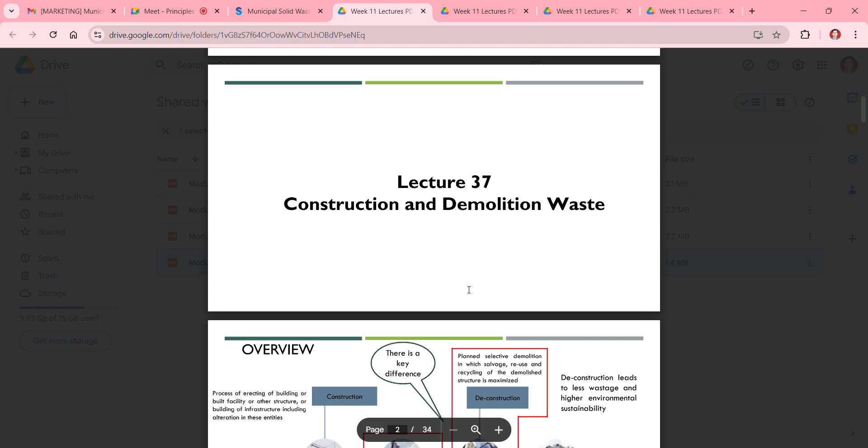Now we will talk about some special waste categories which we generally do not treat under municipal solid waste. We will talk about special waste categories, like the first one is construction and demolition waste. There are four different types: construction, demolition, deconstruction, and construction and demolition waste.

During construction waste, the process of erecting a building or facility or other structures or infrastructure, including alteration in these entities - during the build of a new building facility, or if we are going for a renovation, whatever waste is created during that renovation process or new building construction, that is known as construction waste.

Then coming to the demolition waste, when we are going for the complete demolition of a building, the waste generated during that process will be considered as demolition waste.

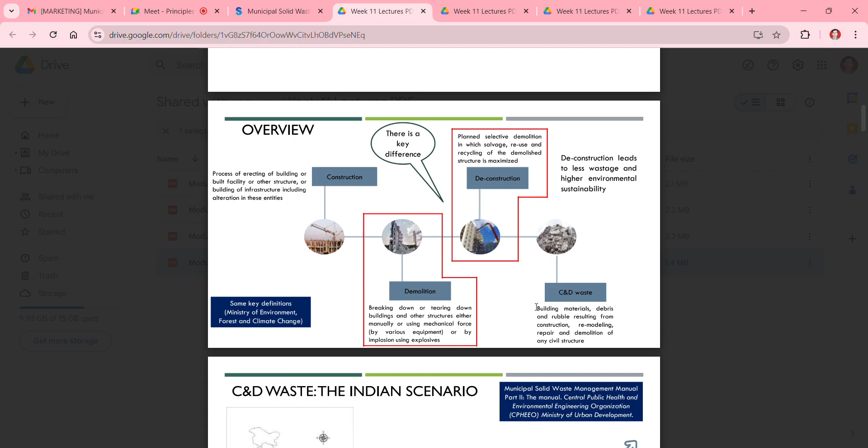During deconstruction, like selective demolition, in which we demolish some part of the building and then recreate it, the waste generated during that process is known as deconstruction waste. This whole waste is commonly known as construction and demolition waste, and we already know that this waste cannot be recycled back easily.

So we have to go for the landfilling process only. But the main problem with this construction and demolition waste is the higher quantity of that waste - it takes very high volume during landfill processing, and that requires a huge area of landfill sites.

We cannot recycle this construction and demolition waste easily, and if we are also going for the landfilling process, that will not help us create any biogas from this waste, nor any composting from that waste. So that is a very huge problem during municipal solid waste management.

The major components involved in this waste are broken bricks, cement plaster, steel material which is generally used for reinforcing concrete, and then rubble and stone, timber or wood - especially in demolition of old buildings, where they used a high amount of timber or wood during the building process.

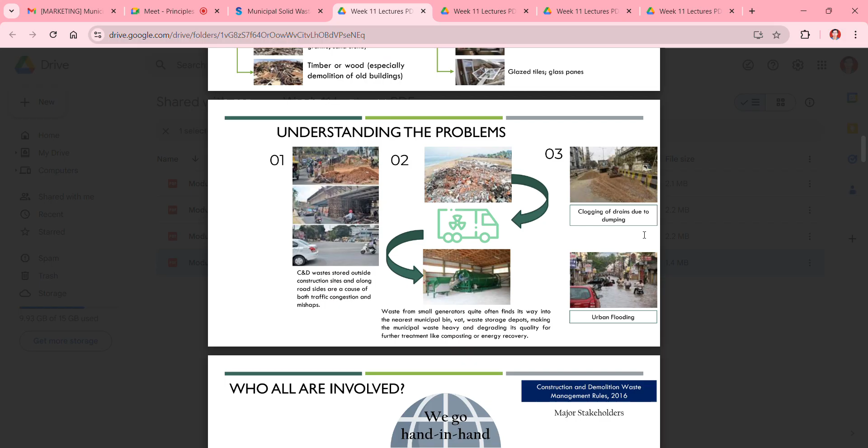The major stakeholders involved in the generation of these types of waste are generally service providers, waste generators, and local authorities.

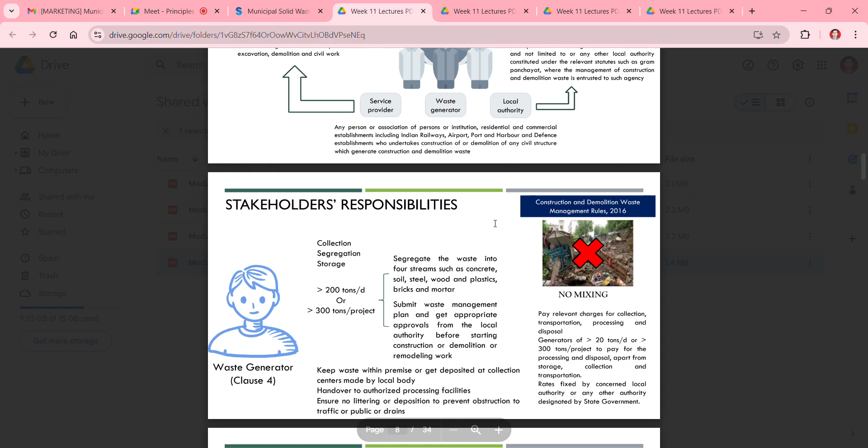There are some responsibilities of stakeholders for the proper utilization of construction and demolition waste, like collection, segregation, storage. Generally in India there are two categories, like 200 tons per day or 300 tons per project.

Segregate the waste into four streams such as concrete, soil, steel, wood, and plastic. Steel, wood, and plastics can easily go for the recycling process. For other waste, we have to think about what to do with concrete, soil, bricks, and mortar.

Submit a waste management plan and get appropriate approvals from the local authority before starting construction, demolition, or remodeling work. We have to take proper permission from the local authorities before starting any construction and demolition work, so that they can be prepared for the proper management of the waste generated during the whole process.

Keep waste within premises or get it deposited at collection centers made by the local body. Hand it over to authorized processing facilities, and ensure no littering or deposition to prevent obstruction to traffic, public areas, or drains.

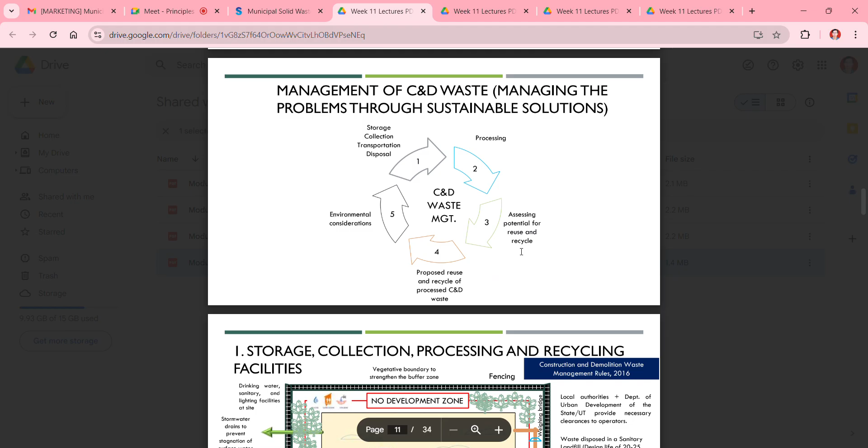Then there are some other things like processing. What are the processing steps for construction and demolition waste? C&D waste can be put to profitable use, given the scarcity of sand and stone for construction, thereby saving natural resources.

The sand, gravel, rubble, or small stones produced during construction, found in this construction and demolition waste, can be grinded back to make sand particles, and those sand particles can be mixed with cement for reusing it again as a building material.

This prevents public nuisance and traffic congestion issues arising from indiscriminate dumping of construction and demolition waste. The third benefit is it saves valuable space at landfill sites if we are able to properly dispose of this construction and demolition waste.

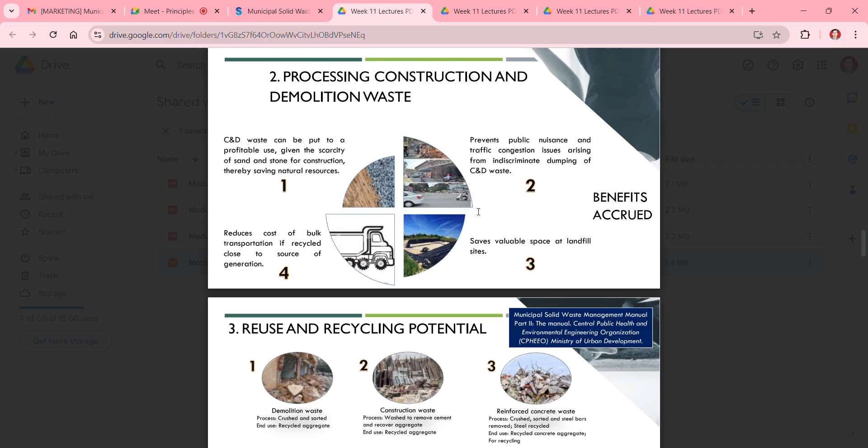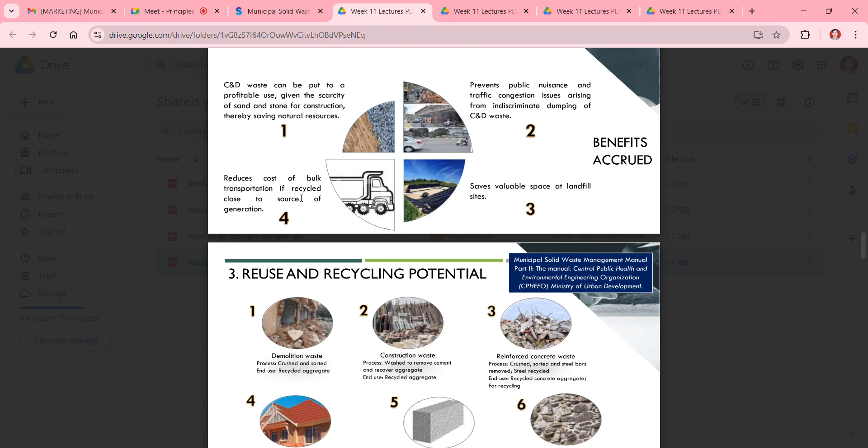If we are able to reuse it as a building material, that will save us valuable space at landfill sites, because construction and demolition waste takes up a huge chunk of landfill sites for disposal. It also reduces the cost of bulk transportation if recycled close to the source of generation.

Coming to reuse and recycling potentials: demolition waste can be processed, crushed, and sorted, with the end use being recycled aggregate. Construction waste can be washed to remove cement and recover aggregate.

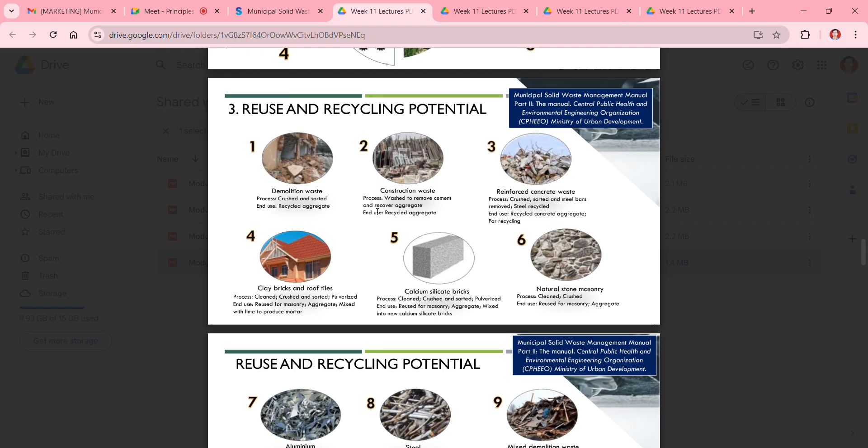The aggregate can be recovered and recycled back into construction material. Reinforced concrete waste can be processed after crushing and sorted to recycle the steel bars, and that steel can be recycled back. The gravels and smaller dirt particles produced during this process can be reused as construction material.

Clay bricks and roof tiles can be cleaned, crushed, sorted and pulverized, and then reused for masonry aggregates mixed with lime to produce mortar.

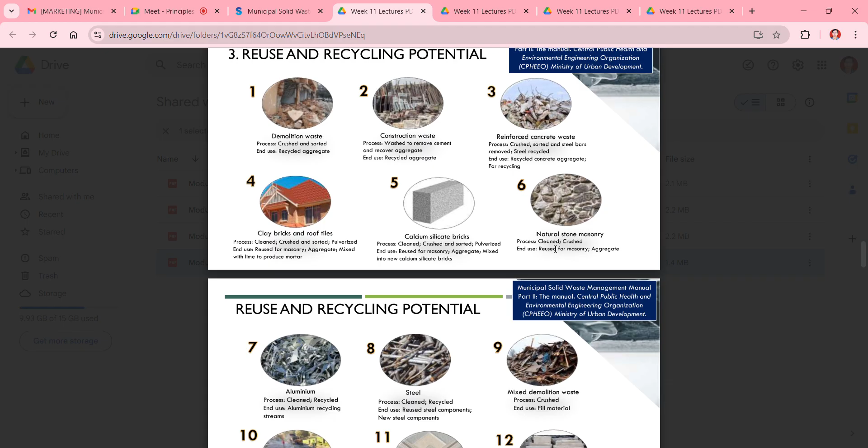Calcium silicate bricks can be cleaned, crushed, sorted and pulverized back into powder form, and that can be reused as a raw material for creating the mix for new calcium silicate bricks. Then natural stone masonry can be cleaned and crushed, and after crushing it can be reused as masonry or as an aggregate material.

Aluminium, which is produced from window angles, and in new buildings we see aluminium doors being used, can be directly recycled back, and the steel produced during construction can also be recycled back easily.

Mixed demolition waste can be crushed and reused as a filler material during the construction of a new site.

Asphalt paving and ceramic tiles, the waste created during construction and demolition, can be crushed and grinded into powder form. If it contains plastic, steel or aluminum type material, that can be easily recycled back. Otherwise, everything else can be crushed and grinded to form fine powders and reused back as a construction material itself.

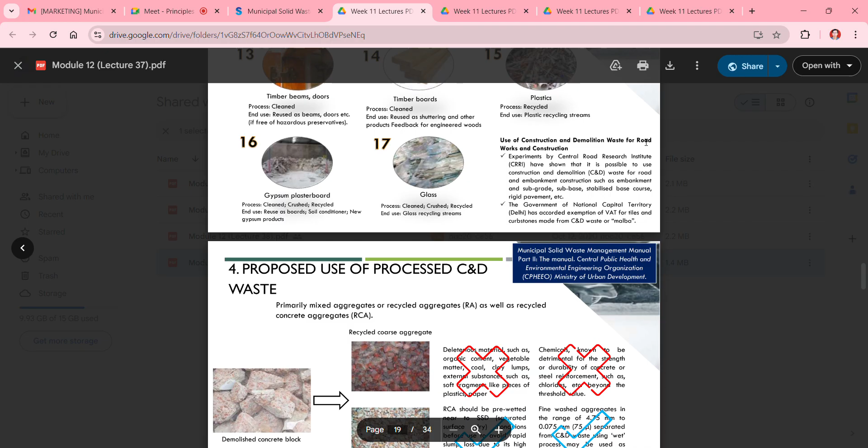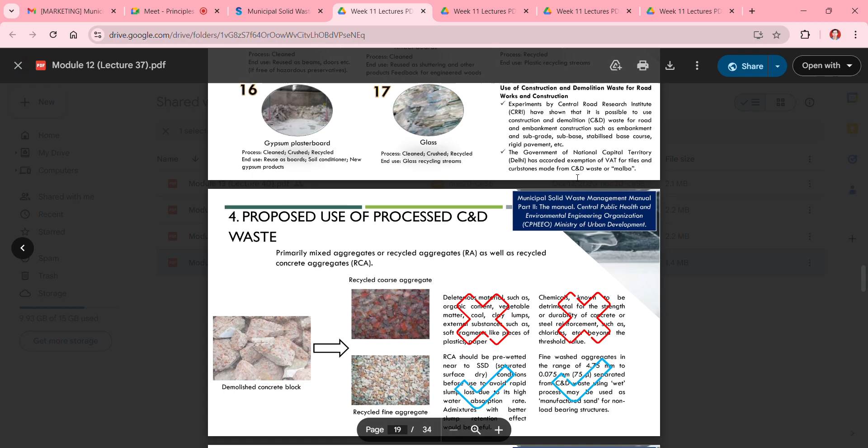So there are some proposed uses of construction and demolition waste, like we are able to easily recycle the plastic, steel, aluminium, and asphalt material produced during construction and demolition. So what are the other proposed processes for recycling the remaining part of that waste?

Demolished concrete blocks can be grinded to a finer size and recycled in the form of fine aggregates. These recycled concrete aggregates (RCAs) should be pre-wetted near to SSD, saturated surface dry, conditions before use, to avoid rapid slump loss due to their high water absorption rate. Admixtures with better slump retention effect would be useful.

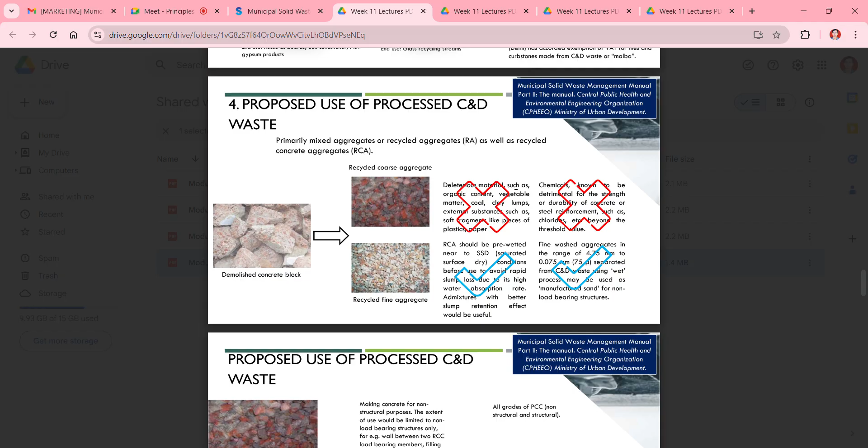These recycled fine aggregates can be reused back as construction material for providing proper absorption of water, or if we want to create a proper water cleaning system, this type of waste can be reused as an absorbent material for creating water purifying systems. Then there are some other proposed uses of these.

So there are some quality standards which we have to maintain during the creation of construction and demolition waste, or during the construction and demolition of any new building.

Coming to the second special waste category, which is related to biomedical waste, e-waste and inert waste, the management of this waste should be done in a different manner. These cannot be counted under municipal solid waste. We have already discussed in the previous week's lectures that biomedical waste, e-waste and inert waste cannot be counted as municipal solid waste.

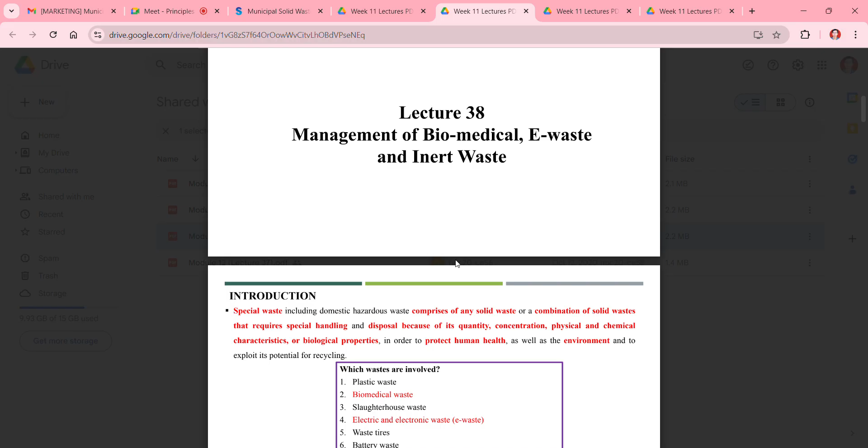Special waste, including domestic hazardous waste, comprises any solid waste or combination of solid waste that requires special handling and disposal because of its quantity, concentration, physical and chemical characteristics or biological properties, in order to protect human health and environment.

These types of waste comes under the special waste category. These types of waste generally include plastic waste, biomedical waste, slaughterhouse waste, electric and electronic waste which majorly includes batteries and wires, then waste tires and battery waste material.

Special waste including domestic hazardous waste should not enter the municipal solid waste stream. It should be treated in a different manner. Special waste are generated at the household and commercial level, and due to the lack of segregation at source or improper collection system, they frequently end up in the mixed municipal solid waste stream.

According to the guidelines of the ISWM hierarchy, these waste should first be reduced. Then we can go for the recycling process, and waste that cannot be reduced or minimized should be reused and recycled. Electronic waste can be easily reused or recycled.

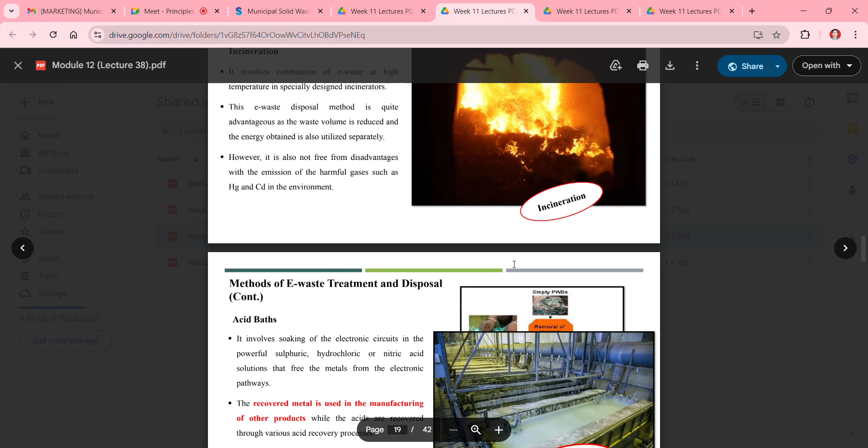Another method is the acid bath. It involves soaking the electronic circuits in powerful sulfuric, hydrochloric, or nitric acid solutions that free the metals from the electronic pathways. During the acid bath, whatever metal is present inside the e-waste dissolves in the acid, and the plastic remains as residue material.

The recovered metal is used in manufacturing other products, while the acids are recovered through various acid recovery processes so they can be reused for recycling fresh e-waste.

Another method is landfilling, the most common methodology for e-waste disposal. Soil is excavated and trenches are made for burying the e-waste. An impervious liner is made of clay or plastic with a leachate basin for collection and transferring the leachate to the treatment plant. However, landfill is not an environmentally sound process.

These types of e-waste also contain hazardous elements like cadmium, lead, mercury, fluorides, and bromine, which get released into the soil and groundwater during the landfill process, creating major health hazards due to disposal of this e-waste.

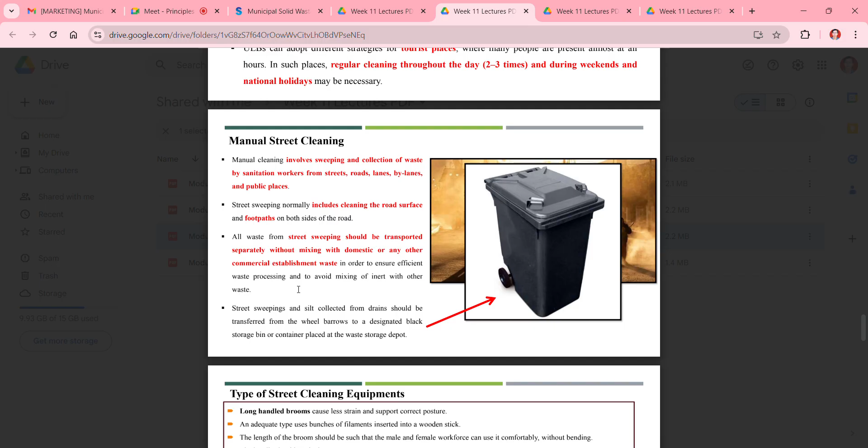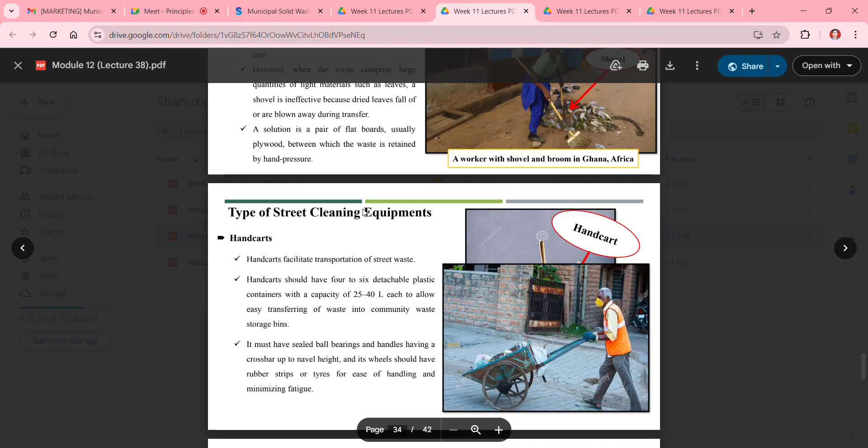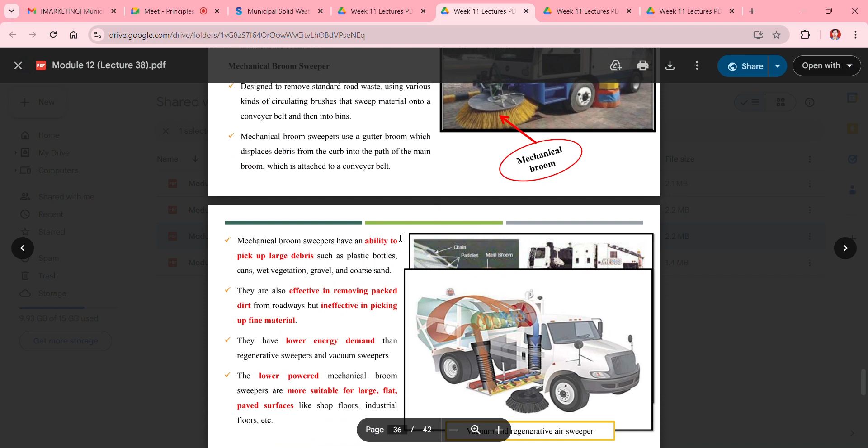Types of street cleaning equipment include long handled brooms, shovels, hand carts, and mechanized equipment. There are some mechanized street cleaning equipments also, like mechanical broom sweepers, regenerative air sweepers, and vacuum sweepers for proper cleaning of the streets.

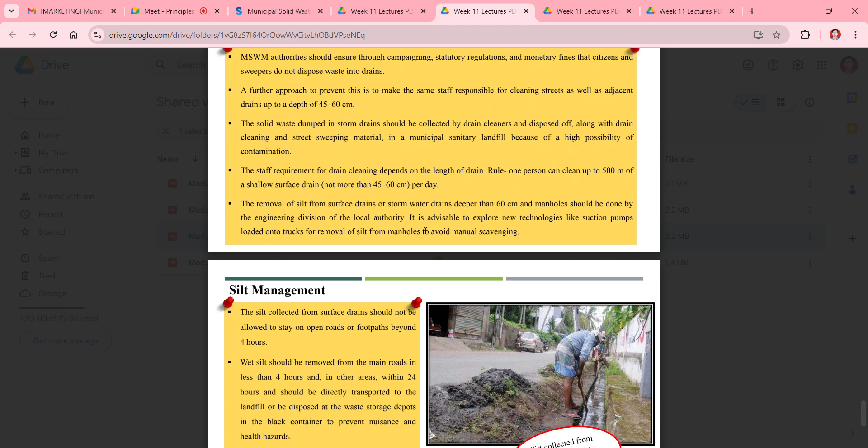Then cleaning of surface drains and silt management should be there. Wet silt should be removed from main roads in less than 4 hours, and in other areas within 24 hours, and should be directly transported to the landfill or disposed of at the waste storage depots.

The silt produced during street cleaning cannot be recycled back easily, so it has to be directly disposed of at the landfill site itself. This waste is not amenable for composting given the possibility of high contaminants and inert content in the silt, so it has to be directly disposed of at the landfill site so that it can be easily landfilled.

Then, integrated solid waste management rules and municipal solid waste management rules - these are rules which you have to read and remember. There is nothing much about understanding these rules.

What are the areas of application of these rules, where it will be applicable, or on whom? It will be applicable on ULBs, census towns, industrial townships, areas under Indian Railway, ports, harbors, airports, air bases, central and state-owned organizations like defense establishments, then places of pilgrimage, religious and historical importance. Every domestic, institutional, commercial, and any other non-residential solid waste generator situated in these areas should come under these ISWM rules. So different waste generators are every household, event organizers, market associations, hotels and restaurants, gated communities, and resident welfare associations. So in the ISWM rules, there are different rules for different types of waste generators.

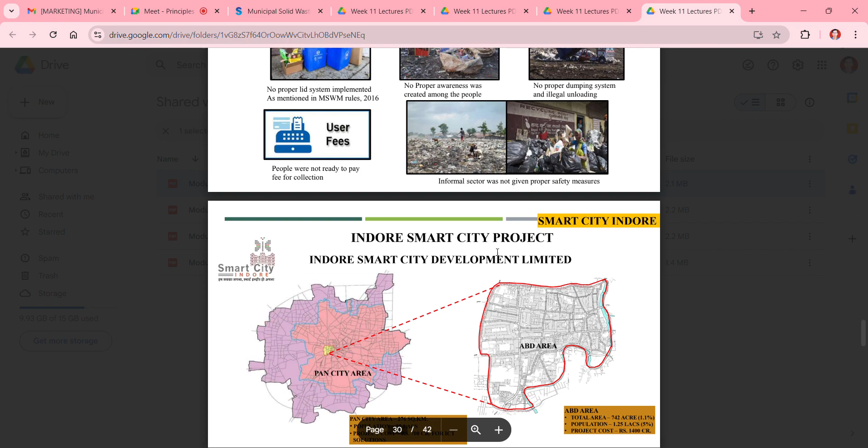Then duties and responsibilities for local authorities, framework and outreach - there are some different rules which you have to read. Then there are some rules for sanitary landfills, standards for treated leachate content produced during landfills, then standards for incineration. There are case studies for Hyderabad, Ahmedabad, and Smart City Indore, which you can read.

So now we will go for some question answers based on this week's lectures.

First question: which of the following activities is most preferred in the ISWM hierarchy? We have talked about the ISWM hierarchy - the first activity which should be done is they should reduce the waste generation at the source itself, and they should try to reuse it if they can. That will help in the reduction of solid waste generated, and that will help the municipal corporation for proper disposal of solid waste. Then according to the ISWM hierarchy, after source reduction and reuse, the second most preferred one is recycling. Then waste to energy will be third, and fourth will be landfill. So the most preferred ISWM hierarchy is source reduction and reuse of solid waste generated in any type of community, household, or institution.